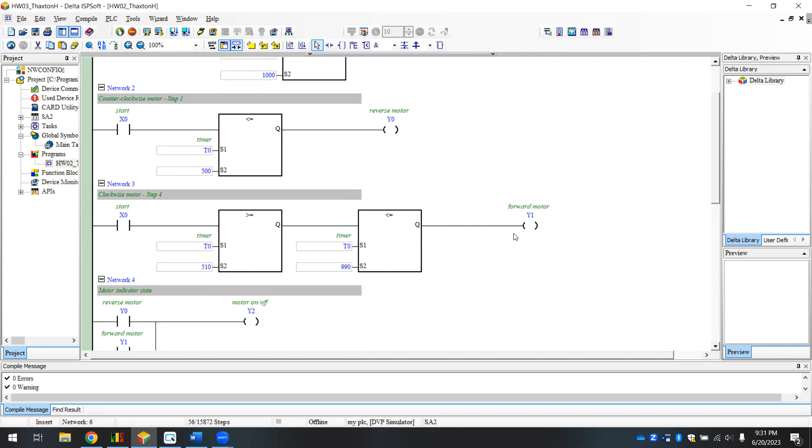But then we're going to have the clockwise motor with our forward motor. This is our motor indicator state for our on-off motor. And then this is where we get into the conditions for the cylinders. Here we have cylinder 1, and here we have cylinder 2. And we're just using the same timer to implement these.

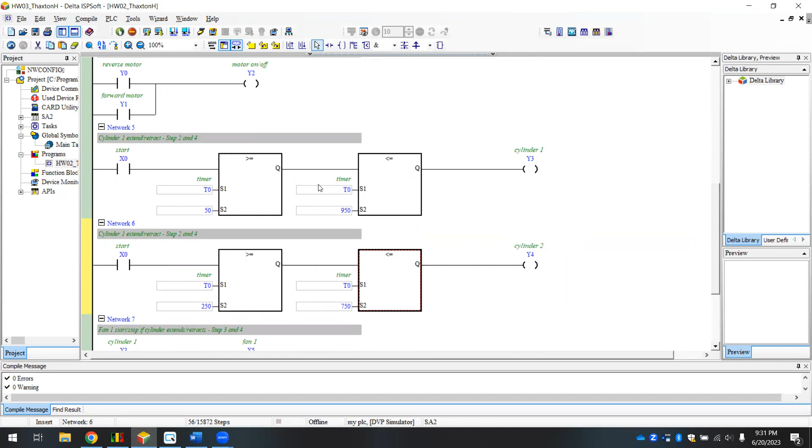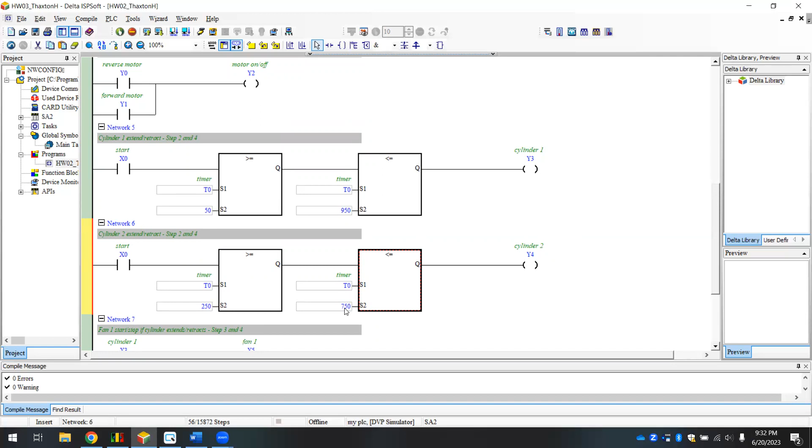So when we click our start button, our timer is going to start, and our motor is going to be going in a counter-clockwise motion, which means that after 5 seconds and after 25 seconds, these two cylinders are going to extend. Cylinder 1 and cylinder 2 are going to extend, and this cylinder is going to stay extended from 5 seconds to 95 seconds, in which case it will retract after 95 seconds. Cylinder 2, which I need to change that. Cylinder 2 extends after 25 seconds, and then cylinder 2 will retract after 75 seconds, which we have here.

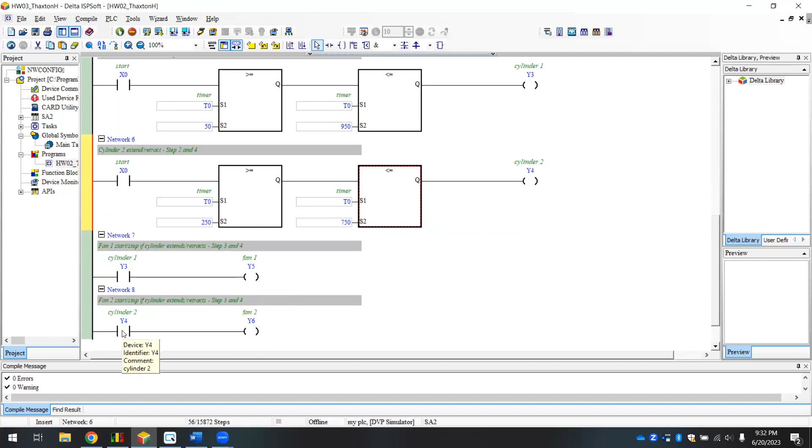And in order to cut our fans on, we just made some contacts for our cylinders and some coils for our fans, so that hopefully when Y3 cylinder extends, the fan for fan 1 will start to rotate, and then whenever cylinder 2 extends for Y4, the contact will come on, and then the fan will turn on for this.

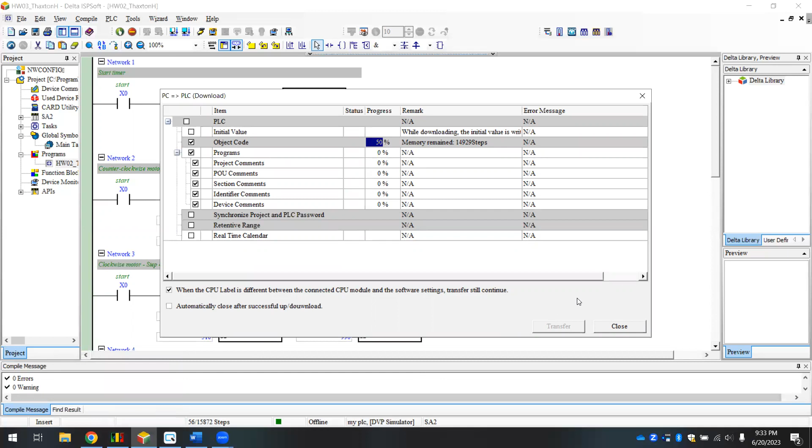So now that we have seen the code, let's test it. We compile our code with no errors. So we download to the PLC, and we know that our COMMGR is on because we checked it. So after this downloads, we'll close, turn into online mode, set our MPU, run our program.

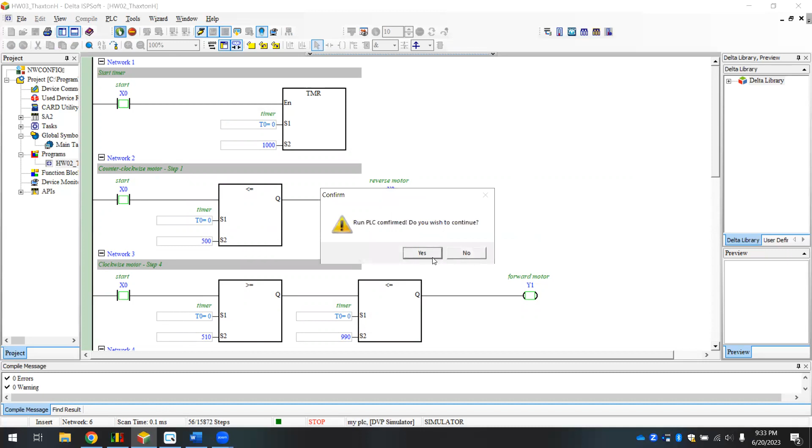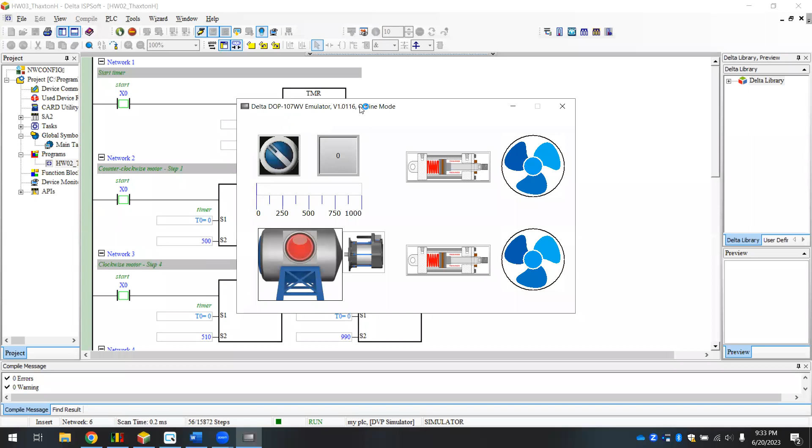Now that our program is running, we switch over to our DOPSoft, just compile, make sure everything's okay, everything's good. Start our offline simulation. Now, we'll put this down here. When we hit our start button, our motor should turn counter-clockwise, and then after 5 seconds, the first cylinder should cut on. So start it.

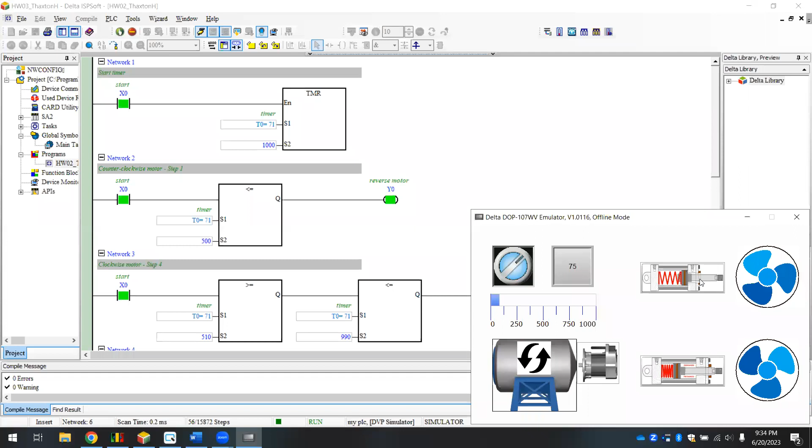See our timer's going. Our motor's rotating counterclockwise. There goes our first fan. See here, after 25 seconds or 250 count, this one is gonna extend and turn this motor on. There we go.

And then now we wait for this one to hit 510, which we're going to see this cut off, or we should see this cut off for like 1 second, and then it'll switch. So we're approaching 500, it's off. Now we're going the other way.

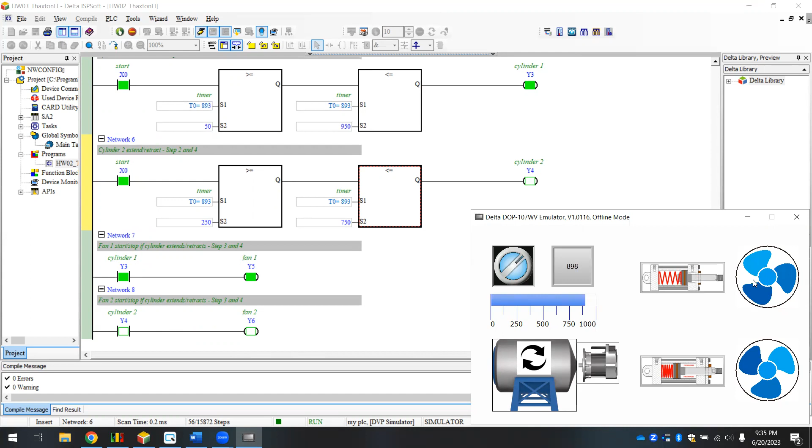So now, after 750, we should see cylinder 2 and our fan down here cut off. As we're approaching 750, we can see this one is cut off. Fan 2 is stopped. Now as we approach 950 or 95 seconds, we should see this one retract and this fan cut off as well before our whole system cuts off at 99 seconds.

And there we go. That is my homework 3.